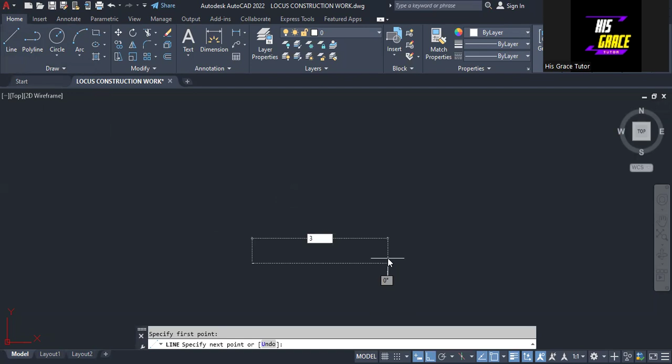Let's start and see how this construction can be done. The first thing I want to do is construct the triangle, so we'll come here to line, and make sure we enable ortho mode. Then I click on line, and draw a line to 30. So this is 30, and then I will right click and deactivate it.

Next, I'm going to repeat the line, then click at this point. But before that, I need to put off the ortho mode so that I can make the line be at an angle. Each interior angle of an equilateral triangle is 60 degrees, so I'm going to make this line at an angle of 60 degrees, as you can see on the screen. Then I will give it a length of 30.

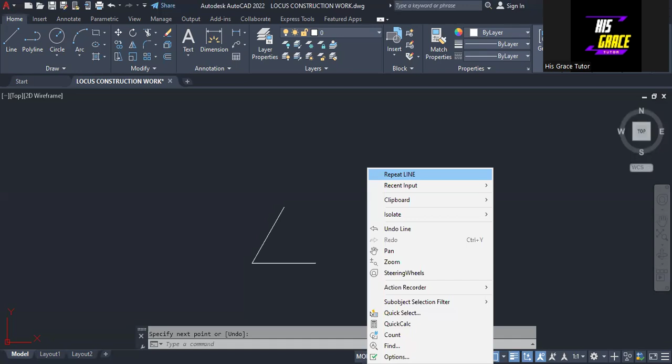So we have that. Then I'm going to repeat the line again, coming to this point, then it goes in this direction at an angle of 120, which will be an exterior angle. So 120, and then the length is 30. So we have constructed this equilateral triangle.

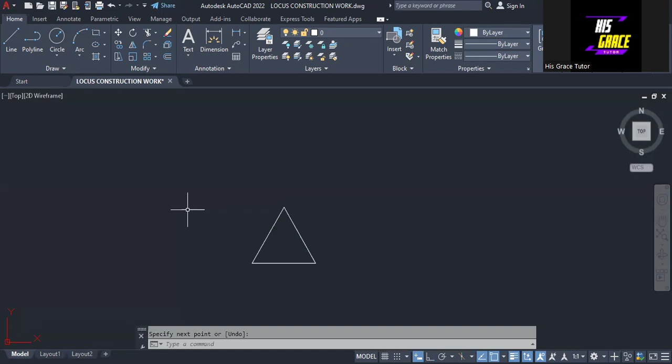Next, we are going to extend this line, but before that, let's number the points. To number the point, I will come to the text tool, and I'm being asked to specify the point. Then the height that I'm going to give it is 2, and for the rotation angle, the angle is 0.

So we have this point. I'm going to have this to be 1. Then I also have this to be 2. Then I have this to be 3. Then I'm going to have another one to be P1, then another one to be P2, then another one to be P3. I'm going to make use of all this.

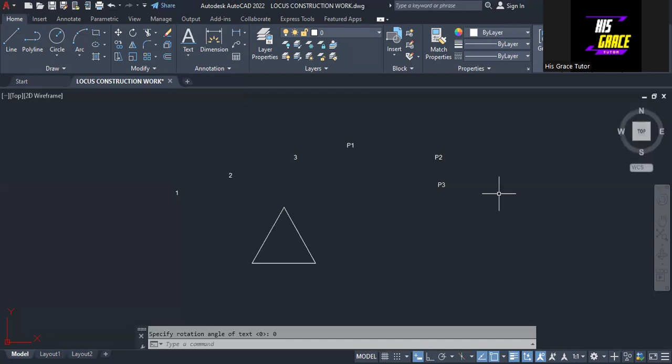So, escape - I'll just click on escape key on the keyboard. The next thing I'm going to do is place each of these. So I'll bring this one to this point, so this is where I have point 1. Then for this, I will bring it to this point, so this is where I have point 2 here.

So I bring it back here, so this is point 2. Then I'm going to bring this 3, bringing it here, so this is where I have point 3. So that's it. So I will deselect.

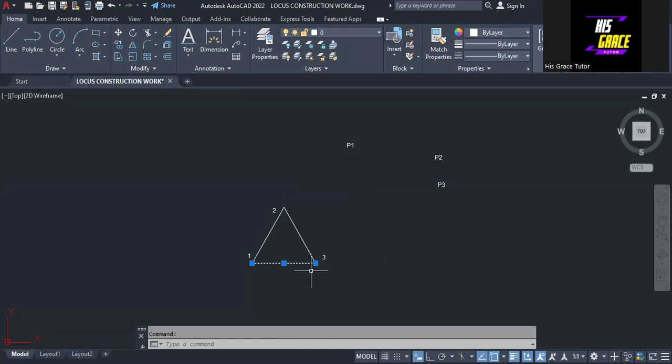The next thing I'm going to do is extend each of these lines. For this line 1 to 3, I'm going to extend it, and the extension is going to be equal to the perimeter of this triangle. For us to get the perimeter, we add the length of the sides together, and the total is 90.

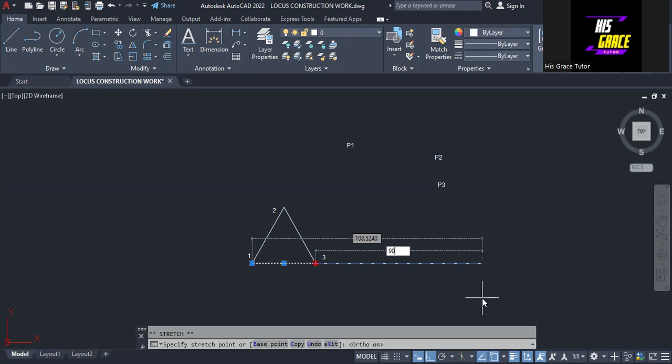So I'm going to extend from this point. I will stretch it, where I need to put on this ortho mode. By length, the length is 90, so the extension is 90 from this point 3. So enter - that is 90 millimeters.

I'm going to deselect this. So this is the line, and this is the point where I'm going to put this P3. So I need to put off this ortho mode, for this to come here. So that is P3.

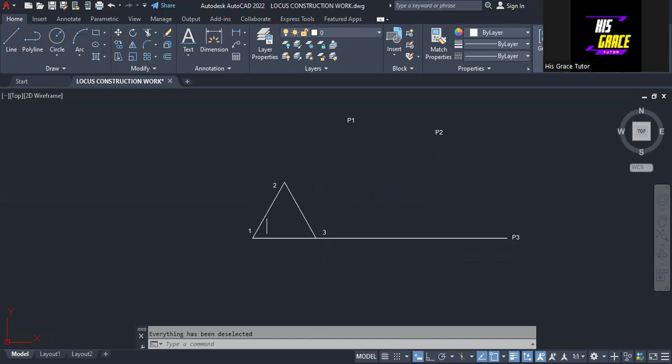So the next thing I'm going to do is extend this line.

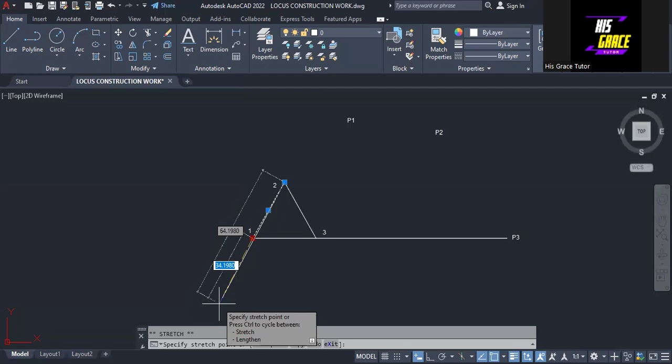I want to extend this line from point 1. The length of the extension is going to be equal to the length of line 1,3, which is 30. So I'm going to extend this by 30 millimeters in this direction. So we have 30, enter. That's it. At this point, I'm going to bring P1 here. So this is where we have P1. I will deselect it.

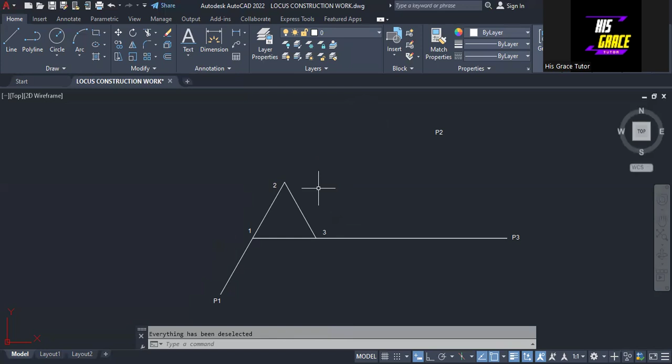Also, I need to extend this line to 3. The extension is going to be equal to 60. So if I click on this, I'm going to extend in this direction, giving it a distance of 60. Okay, so we have this. Then I'm going to deselect this.

So for this now, this point will be P2. I'm going to take P2 here. So we have it here. Then I will deselect it.

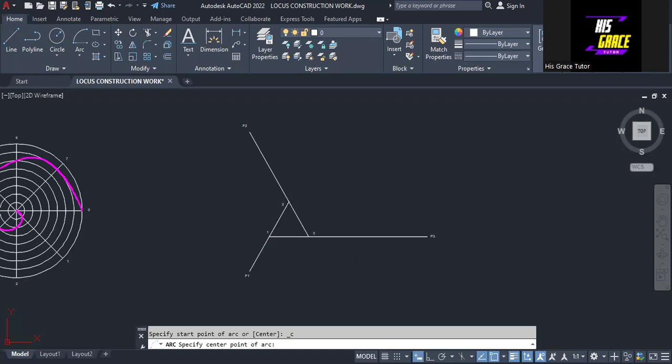Next thing we are going to do is use arc to draw this involute of this triangle. We come to arc here and select this particular one: center, start, and end. So this is the one we are going to use. We select it, and this is the center. If I want to construct the arc here, this is the center. I'm going to come to this point. This is start, and this is end. Right click.

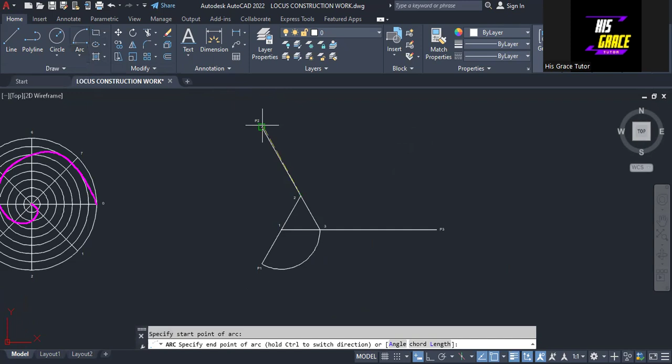Then we repeat the arc again. This is the center. Then I will take it from here. So then this cannot work. I'm going to take it again. This is center. Then I will take it from here. Okay, it doesn't work. All right, so I will come here again and select this particular arc. This is the center. I will take it from here to here. Okay, so we have this.

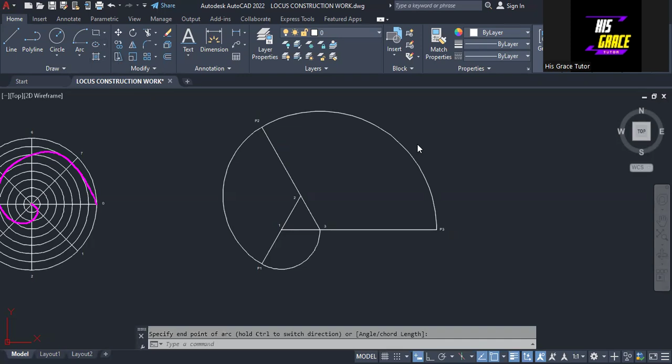So then the next one is that I will also come again and select this one. Then this is the center. Then I'm going to take it from here, from P3, and it goes to this point P2 here. So we have formed this involute of a triangle, as you can see it here.

Next I'm going to use a particular tool to make the arcs or this curve, the locus, to be one. How do I do that? I'm going to type join on the keyboard and then enter. I will select each of them, like this. So there it is. Then I will right click. So it has become, everything has become one.

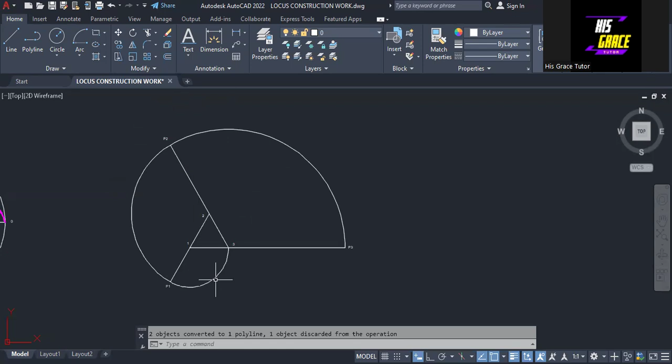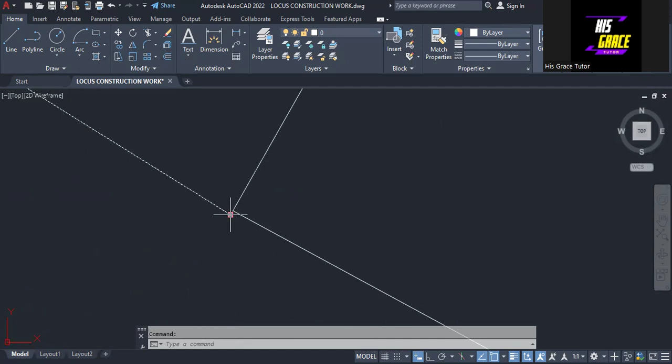I think except this, there is a break here. So how do we do that? I'm going to look at it and join them. I think at this particular point there is a break. I can see it. So I'm just going to adjust, click on this and bring it to this point. Yes, so it's joined. I will deselect it.

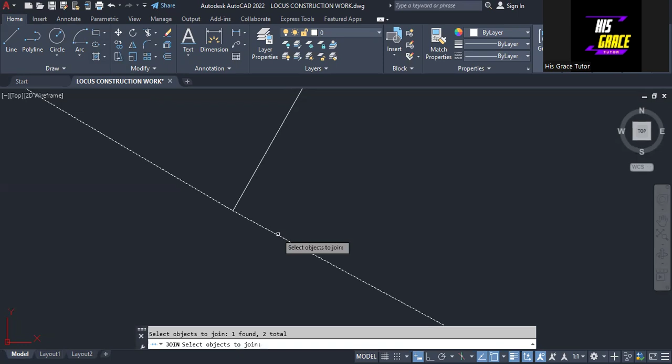Then next thing I'm going to do is type join again. Enter. Then I will select this and select this, then enter. So everything has become one, as you can see here. Let's look at it. So everything has become one, as you can see that they are all highlighted.

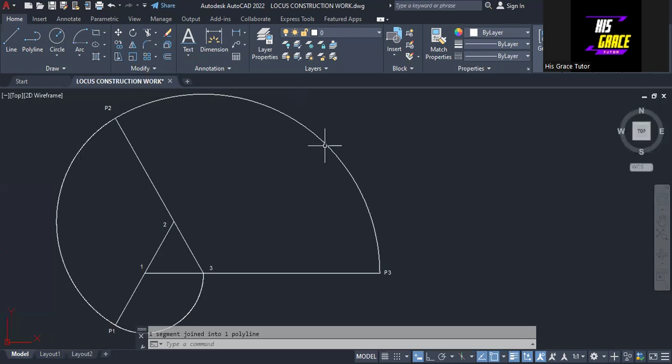Next thing I'm going to do is make this curve look more thicker. I'm going to select it, then come to lineweight, and select this particular one. Then I will also change the color to my preferred color—I love this color. So select this. So this is it. Then I will deselect.

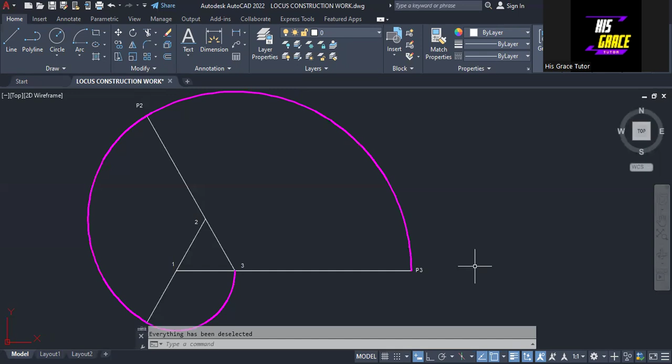So this is the involute of a triangle as we have done it. It's as simple as I've done it here. All you need to do is practice. When you practice this, you become a master at it. Thank you and keep on practicing. God bless you.